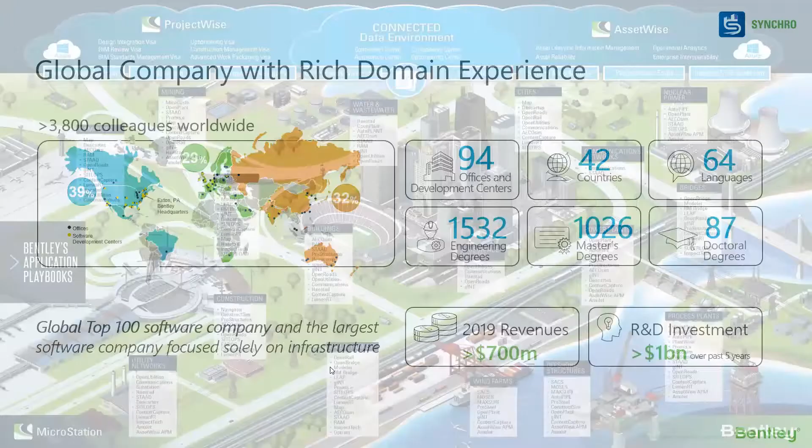Why is it important that we invest in research? Because in this virtual city of Bentley, wherever you have infrastructure, construction, or project planning activity involved, you have Bentley's presence - from buildings to roads to mining to campuses. If you have a water and wastewater project, or cities planning, that can be done with Bentley's platform, to nuclear power and utilities and all. In offshore, we have offshore and onshore wind farm technology, offshore structures technology, jetty design, and shipbuilding technology - you can design a ship there. We have process plants and everything, apart from bridges and power plants.

I'll move to the introduction of the Bentley platform. This is data we collected from different clients - for a couple of years we understand that 20% of the projects we studied ran larger than scheduled, meaning project planning overran, and 80% of projects were over budget. But what are the reasons for that? We understood that in these projects around more than 1,000 people were collaborating, 182 companies were involved, across 6 countries. For that reason, more than 2 million documents were shared, and more than 6 million - 64 lakh - actions and reviews were initiated, because manual technology was involved in every nook and corner of these projects.

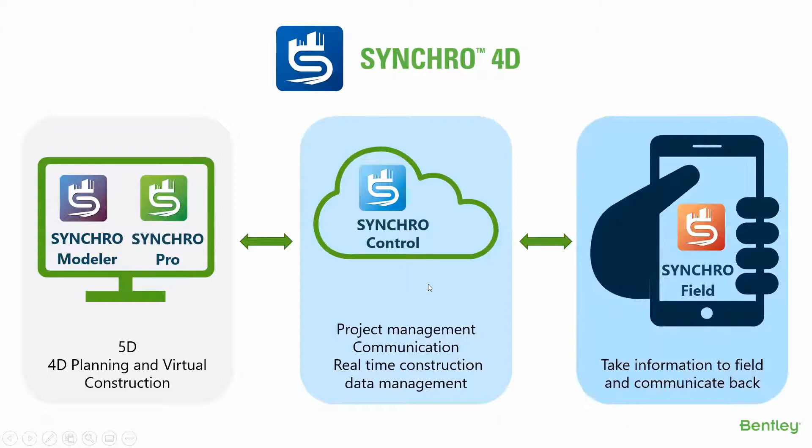Synchro 4D consists of your plain vanilla Synchro Pro with basic technological and logic improvements. We have upgraded our internal processes of Synchro Pro, which consists of Synchro Modeler, Synchro Pro. Now we've come up with a port where we included a project management and construction management part, where we are talking about Synchro Control, and we've come up with an app for use in the field, which we call Synchro Field.

In a nutshell, this is what it does - I'll come into detail later on. It consists of mobile field management. If you have a mobile team who wants to see model-based progress from the site, wants to issue RFIs, daily logs, site observations, or inspection reports, they can use the mobile field management app.

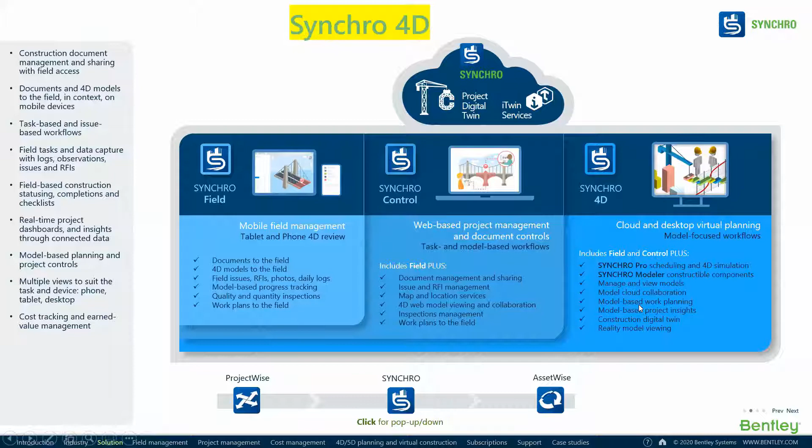Then you have your project management team, project manager, who wants to use issues generated from site, daily observations, or minutes of meetings generated from site, or wants to give instructions to the site - those activities can be performed by Synchro Control. And Synchro 4D will be used for planning and simulation purposes, model-based planning, 4D planning, and all that stuff.

So what is the workflow in this? Initially, for the planning stage, we have an authoring tool - it might be Bentley, it might be Autodesk Revit, it might be Trimble Tekla. With that authoring tool, we do a high-level plan in the initial stages, because there are a lot of uncertainties in the project, but you want to go for funding, or you want to bid a project.

So maybe 2 to 5% plus minus, you wanted to consider, but you wanted to do a high level plan and understand what is the resource optimization you do on that model. Then you took it into Synchro Modeler and create a constructible component from the 3D model that can be used to generate intelligence.

Then you attach schedule. Synchro itself has a full-fledged CPM scheduling methodology, so you do not need an external scheduling software. But as I talked about the 30% apps that don't talk to each other, we allow people to talk to other apps also. So if you have Primavera or MS Project, you can import that and extend your 3D model.

To that and create a 4D schedule part. Then you send that to the project management team, your project manager, or construction manager for verification, and then after verification you can send that to site.

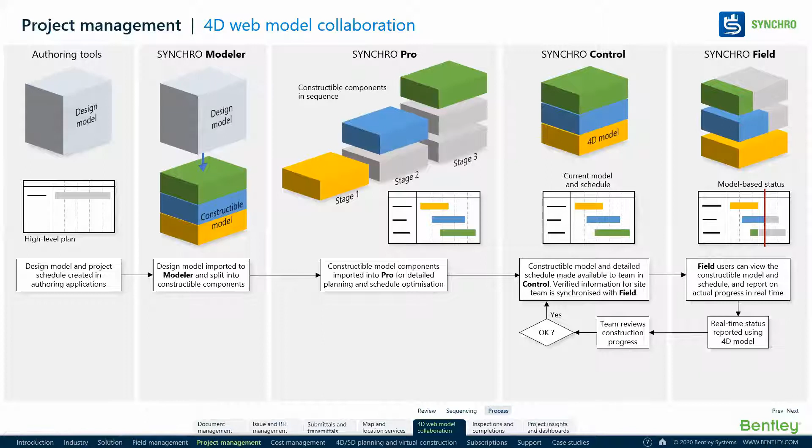You can send it back to your 4D planner. If he says yes, he can go back, but if there are some changes required in the model, he can again send it back to Synchro Modeler, your modeling team for the constructible component, and then send it to your consultant or whoever is doing the 3D model. Again, take this cycle. So this cycle is entirely a collaborating platform, and you can always tag people who are responsible and accountable for this.

So I'll start with the Synchro Pro part where we use Synchro Modeler. Synchro Modeler basically takes iTwin Services and iModelHub technology to improve interoperability by importing any 3D design model. It splits the model into smaller components, assigns cost codes and all, and it actually validates your plan.

So how does it do that? How do we do that? A lot of times, some of you are involved in linear infrastructure projects, and you have come across suggestions from the consultant that you wanted to break down the infrastructure project in a constructible format.

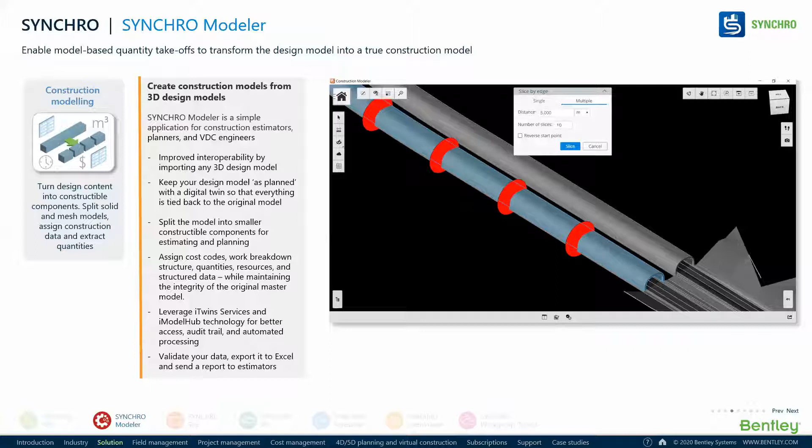Also, your crew ability may have the capacity to construct a layer, maybe a subgrade layer, maybe 20 kilometers a day or 10 kilometers a day. So you have to divide that and create the schedule. But all the design softwares like Bentley Open Roads or Civil 3D do the modeling by mesh analysis method, so cutting the cross section in your planning software is difficult.

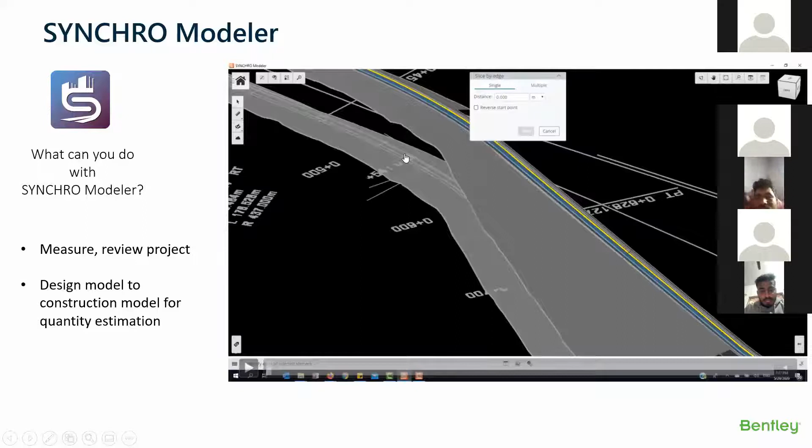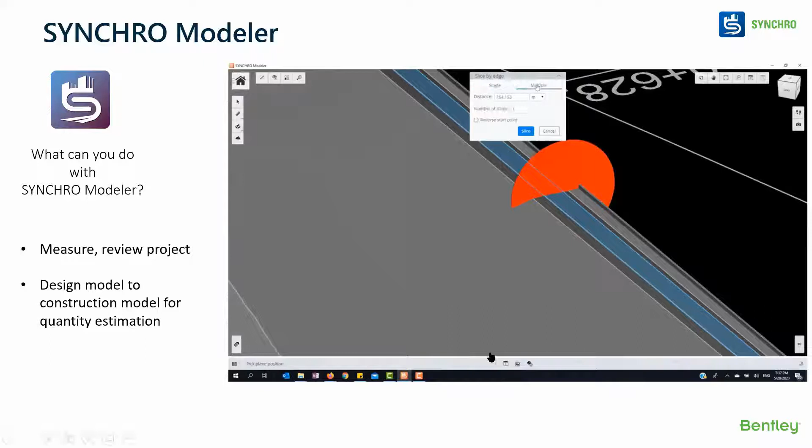So here I am giving multiple slicing and giving a distance which can be constructible, dividing the slice. So what is happening? I have this information that these slices—1, 2, 3, 4, 5 slices—has to be cast in 5 different days, so that I could attach that schedule here.

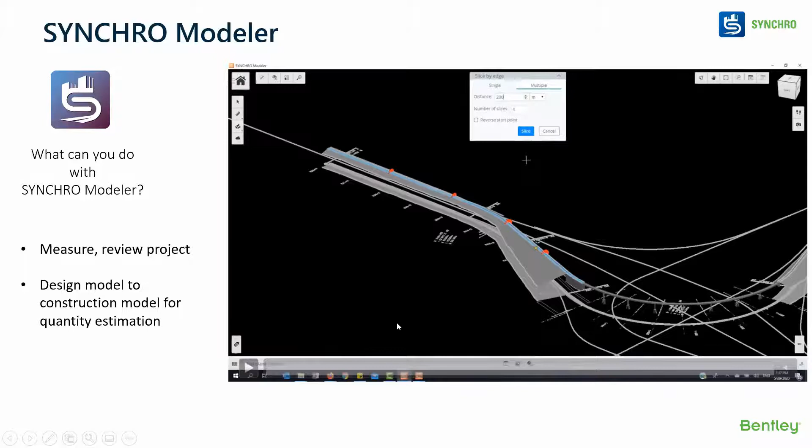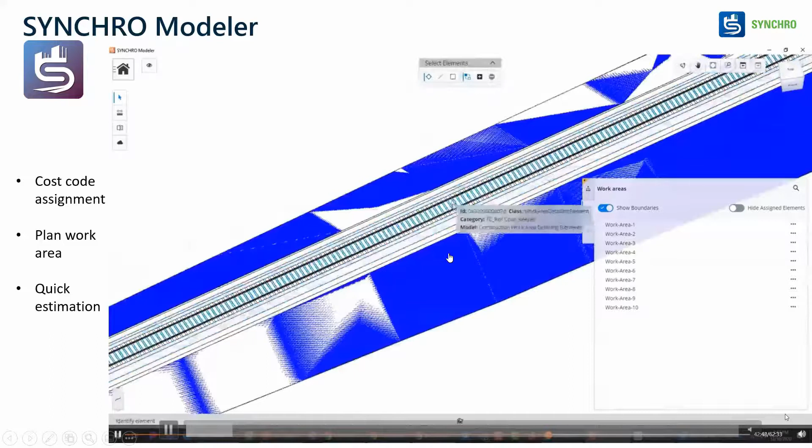Other than that, let's say you wanted to go for a quick cost estimation or cost analysis. For that reason, say you have a 100 kilometer road or rail—this is a typical rail project where we got the 3D model from Open Rail Designer, and we wanted to divide it into constructible components. For a 100 kilometer project, you might decide that 10 kilometers will be for project team 1, plus 10 kilometers for project team 2.

So we have divided it into constructible elements and divided the work area, so that you have better control on the project and who is doing what.

So after we create an area breakdown, we go for a quantity takeoff analysis. In this area breakdown, you can see we have work area 1, work area 2. Let me click on work area 6 and isolate it. So I understand, as a project manager or assistant project manager, this is the area I am having responsibility for.

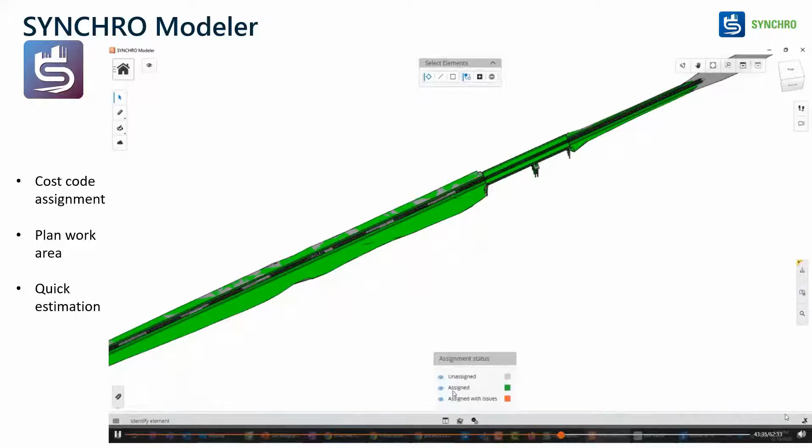But how do I get a volumetric cost calculation? How do I get a volume? So you have a 3D model. This is the 3D model. I know the 3D model volume.

Let's say this pier, and I wanted to check the cost of the piers to understand what will be my BOQ value, so that I could send that to maybe the tender department, or maybe a project manager, or maybe a portfolio manager.

So here I have created these cost codes. After creation of the cost codes, you could see I have created concrete cost codes. What will be the concreting cost? What will be the structural bridges cost? When you want to do concreting of a structure, what will be the cost?

So you have this cost estimation, or unit cost from your site, or maybe from a previous project, or you have taken a rate from your contractor, subcontractor, or labor contractor. So I just assign that cost here for piers, or for earthwork and rail—all the other costs I can assign based on the volumetric calculation.

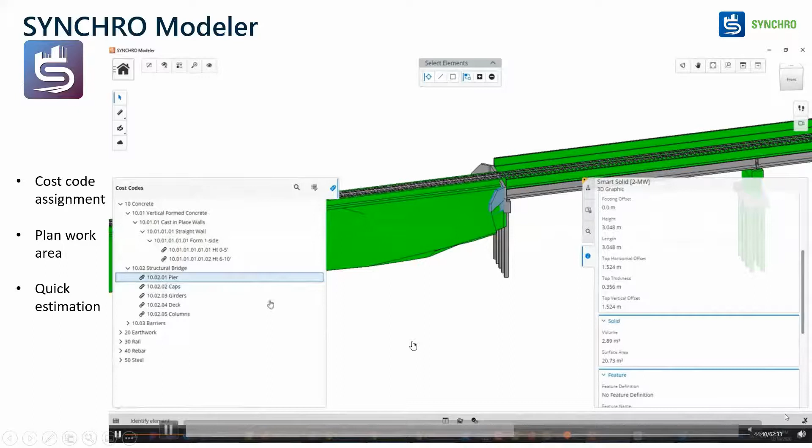So if you have a 3D model, I can assign all the cost codes. If I have the Excel file, you can see in the pier what is the volume here. When you assign this to the pier, that volume is taken into consideration and multiplied by the unit cost you got from your contractors maybe. So after getting that, you understand exactly what the cost for the pier will be when you want to cast that on site.

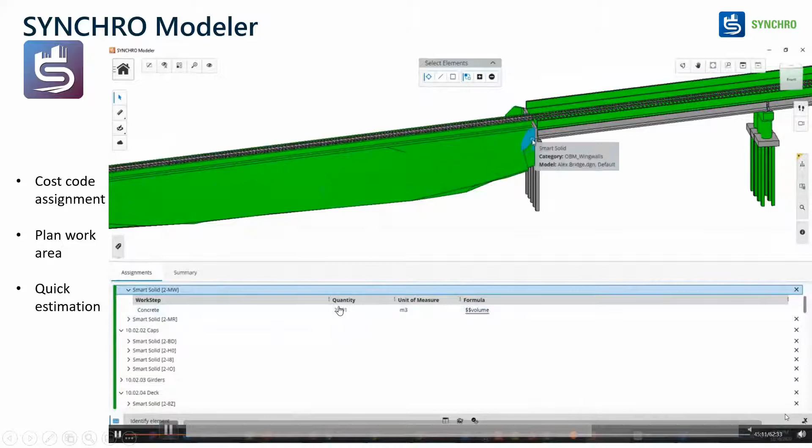So let me go to the assignment where I want to see what cost has been given to this pier. When I click that element, you can see the concrete is 2.891, that has come from the site. The unit has been measured, and I have a formula for the volume.

Similarly, if I want to see the rebar part, I could create a volume and understand it—I could create a formula. Maybe in this wall there is no rebar or reinforcement at the initial level, because you are doing a high level calculation. So you could give a formula of volume into wall length and apply a rebar factor—maybe from thumb rule, 0.2% will be the multiplication for the wall rebar and rebar weight.

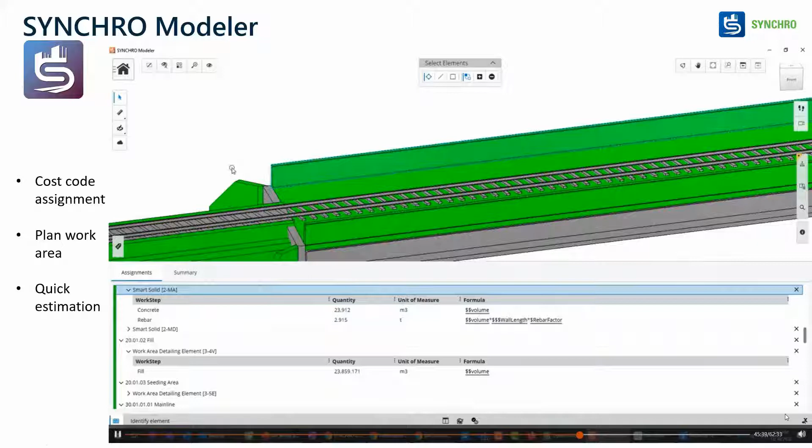So that calculation you could do, and you can import it over here, so you know exactly what to implement from your old project standards also. Similarly you can do a summary. I'll just go to the summary and see what is the cost percentage or entire cost on that. You can see these are the volumes, and you can create a cost code for the entire cost on that.

After that, I'll come to Synchro Pro—this comes with the old vanilla Synchro Pro, but now we call it Synchro 4D Pro if you want to go for Synchro 4D. It has all the capabilities like earned value, equipment planning, scenario comparison, health and safety. You want to visualize critical path, that's possible. You could do mobile field statusing and all. What-if scenarios can also be calculated.

So let me go one by one—this has been created only from my users' experience. So one question was how do we integrate the 3D model and schedule? So what do you do? You import a schedule, or you can create your own schedule over here. You could import a BIM model from anywhere.

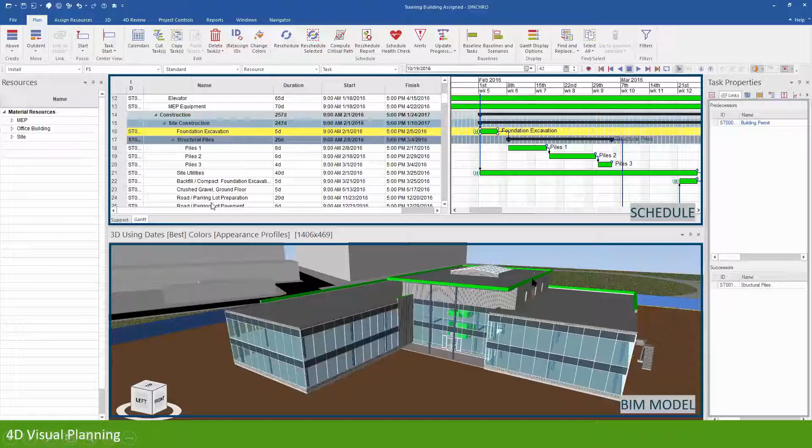So the next question is, what kind of BIM models can be imported? I'll come to that. So then you have the BIM model, you import the schedule and attach that. The question is what kind of BIM models can be imported—you can see all of Bentley, Tekla, Revit, Aveva, SolidWorks, Navisworks, SketchUp. Most BIM models can be taken into Synchro.

Other than that, for schedule you can use Asta, Safran, PMA NetPoint, Primavera, Oracle P6, Microsoft Projects, or even Excel also.

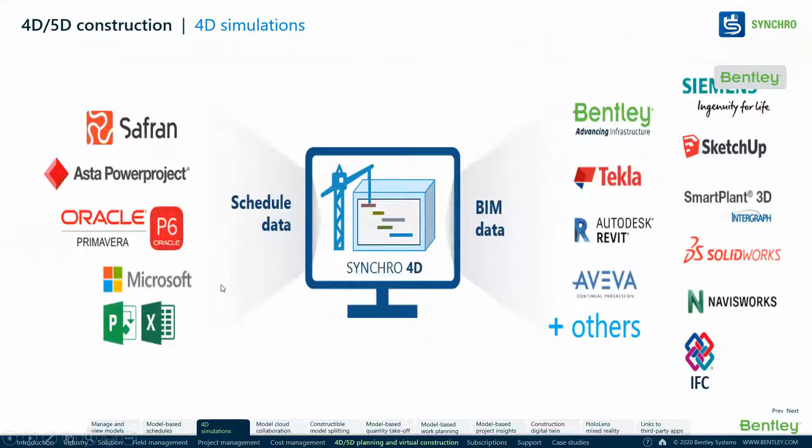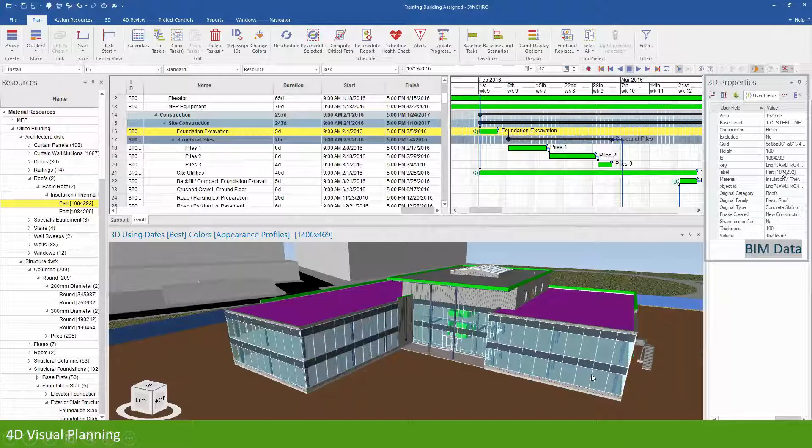So the next important point I wanted to show is 4D visual planning. You can do a 4D visual planning with the BIM data, coming from native softwares. This is a Revit model I have worked on, so you can see the concrete volume, the area, and all that information comes together to create a BIM model.

Now one question always comes: can we do a critical path or a 3D visualization critical path? This is very important from a project perspective, because if you know your critical path and visualize that, as a project manager you can go check those pillars or that place to see if things are working well. You can delegate work for other resources to someone else and concentrate on this critical part. This is the importance of 4D scheduling.

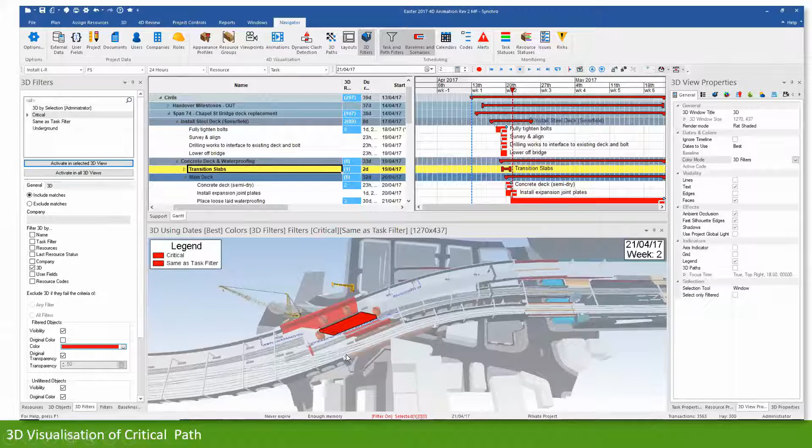How do you do that in Synchro? It is very easy to follow. You can see a schedule is there, a 3D model is there, and what we do is create a task filter.

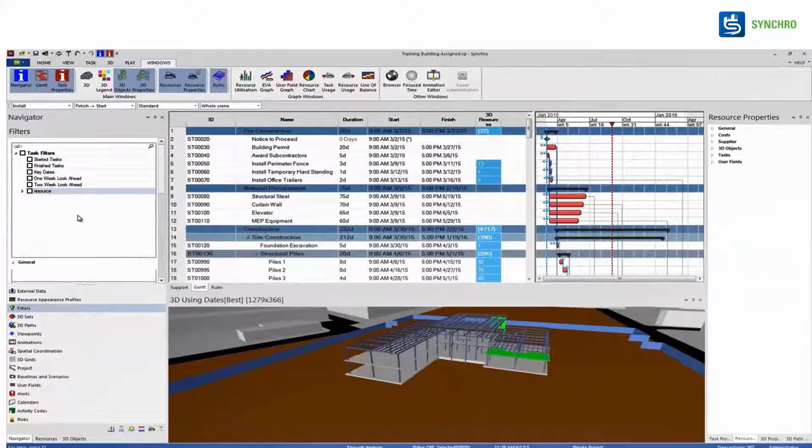On the left-hand side there are a lot of filters. For 3D critical path filtering, we just right click on it, go to filter, and say critical path filter. This only highlights the critical paths. You can definitely create your own color codes and appearance profiles for this combination, but I'm not going into that.

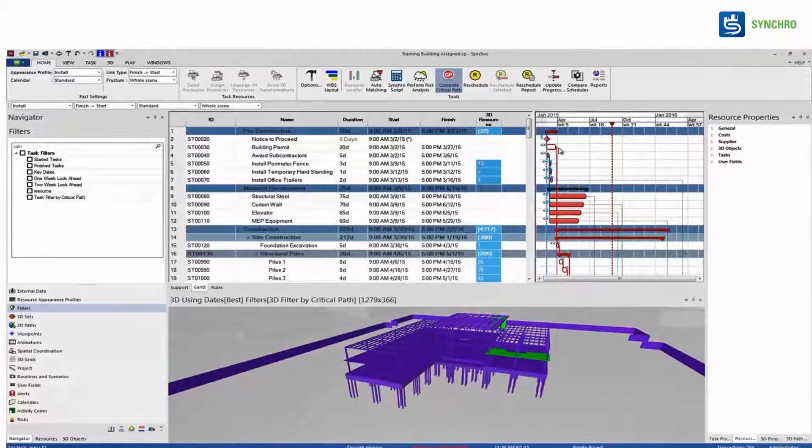In Synchro Pro, it asks you to update the critical path. You update it and your recent critical path, the one at this point of time, will be highlighted. If you don't want to see it, you can view all tasks or only the critical path. As a project manager, from experience, this will be very important for you, so you can put your efforts into envisaging how to work on this critical path in a better way.

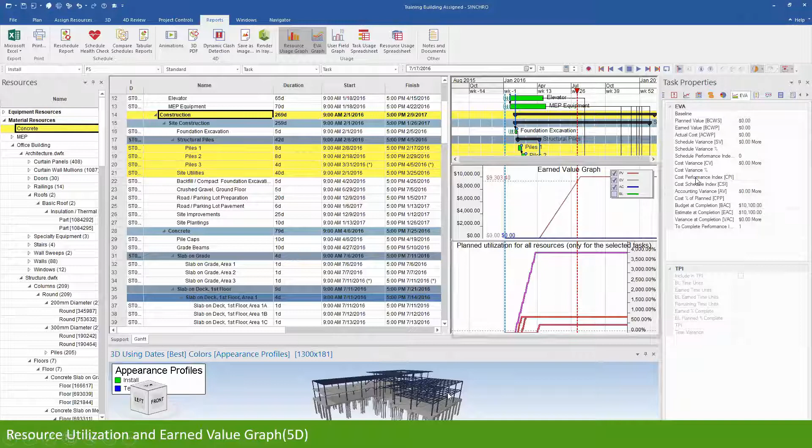Another question that comes up: can we do resource utilization and earned value analysis? Yes. What I did here is create a schedule and an earned value graph with resource utilization. You can see in the task properties the earned value parameters, and I wanted to show how we created planned and actual resource utilization for concrete used for graphs.

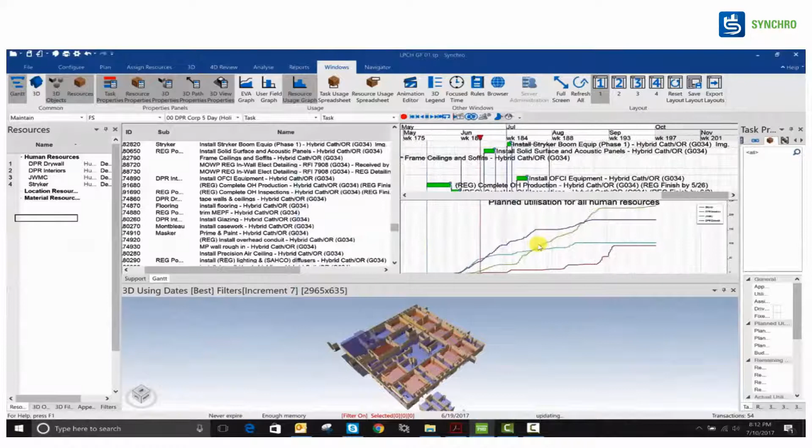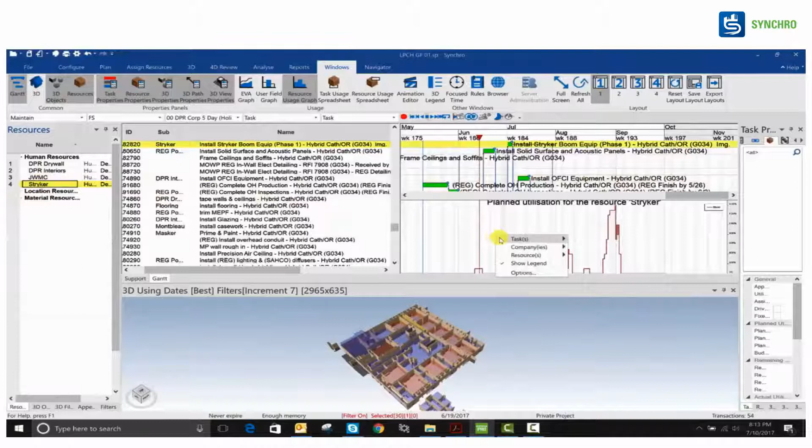Here you can use this planned utilization of human resources, this is the resource we have selected. In the human resources graph, let me check the histogram. For a particular resource, every project, you can use histograms to see what is required on that day for that task and so on.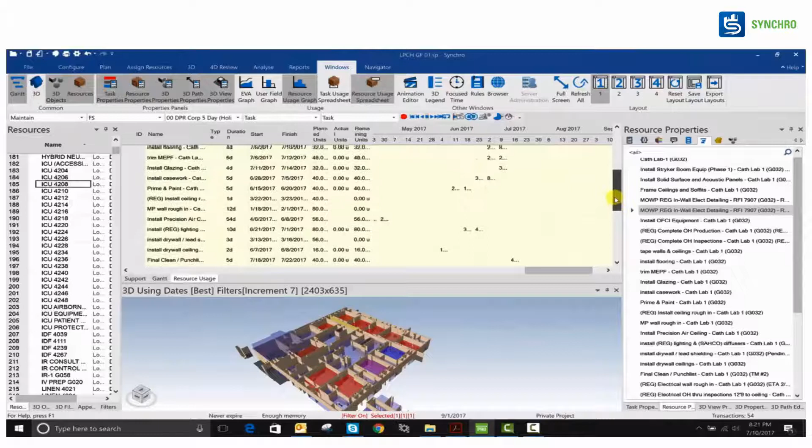Other than that, you can also export this data in a tabular format or to Excel. In this tabular format you can find the planned resource for that day, who is busy. For example, if you want to use a crane in both parts of the site, but that crane cannot be used in both places at once, how do you know? You'll know from this Excel sheet or histogram that the crane is occupied, so you can plan for another crane for that second part of the site.

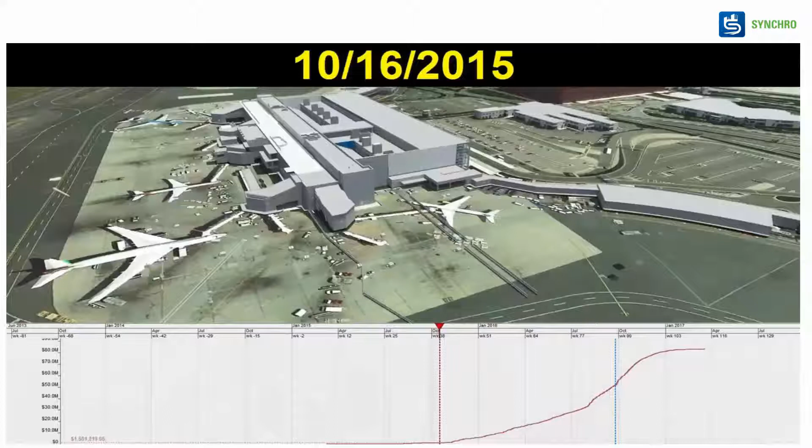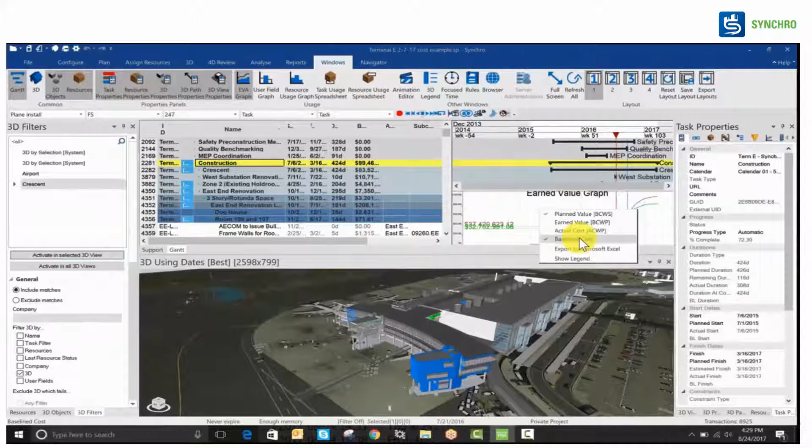So at the Boston airport project, I'll just show an earned value graph of what can be done. This is only a planned value, but you can definitely add actual cost and do an earned value graph too. You can see the earned value moving for the 2015 and 2016 project, and you can attach the earned value graph to the task properties to understand the cost. You can also create as many baselines as you want for this graph, create the baseline cost, and compare that to the earned value cost.

Another question I was asked is whether equipment planning and movement is possible for health and safety purposes. It's definitely possible. This is a project we did for one of our clients, which I won't name. You can see how, for a project, you can move equipment like an excavator or truck, and use cranes or other systems to see the frontage and whether the right of way for that equipment is possible.

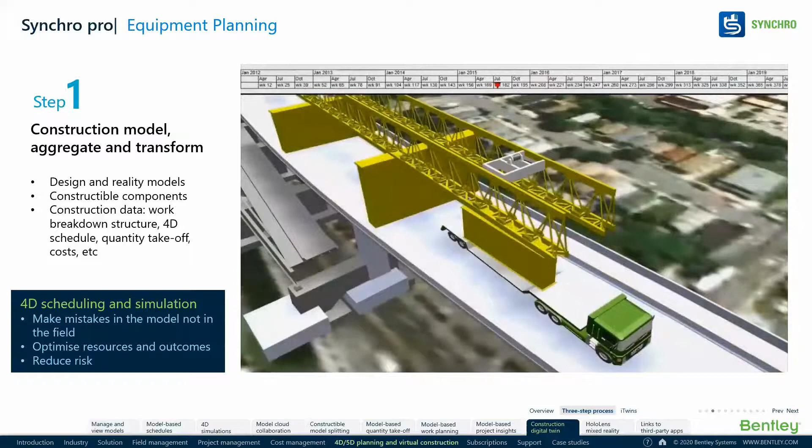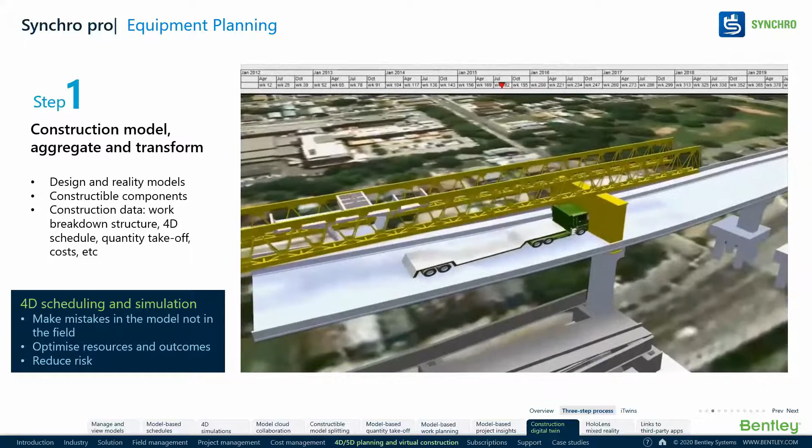Apart from that, for a lot of projects you have a gantry girder or balance cantilever. You can plan how the girder is moved and attach it to the schedule. In this project, you can see the schedule on top and use the balance cantilever for a metro project. Most metro projects use this throughout the world, so if you're involved in a balance cantilever project, you can use it properly.

Another part I wanted to show is how to plan equipment for a linear project. You can plan the equipment accordingly and see the crane movement. This is an interesting crane movement example, where you can plan your equipment to understand the boom of the crane and whether there could be access conflicts with other equipment.

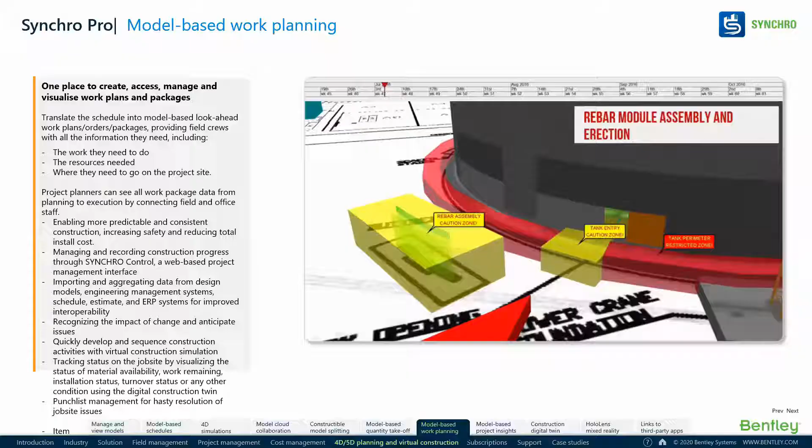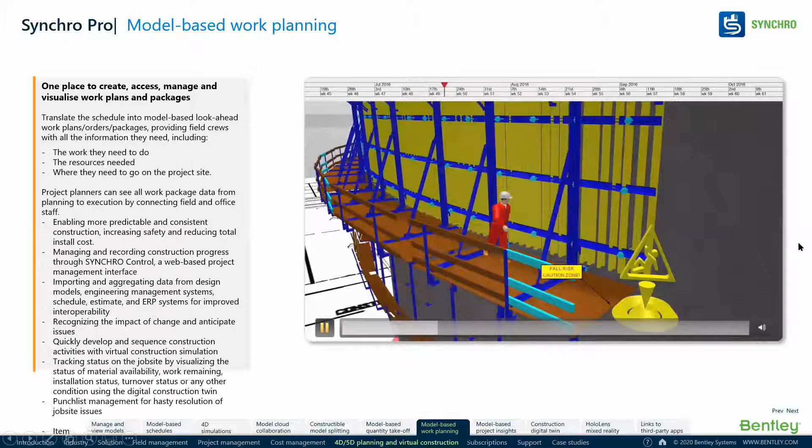Another aspect is health and safety, as I mentioned. Here you can see one project using a slip form technique. One person wanted to move from one part to another, and you understand that this portion has been kept as risky for this kind of equipment, so they don't want the person to move there. You can 4D visualize what happens when the person comes onto the work platform, and really understand and communicate that to a health and safety officer who can work on it.

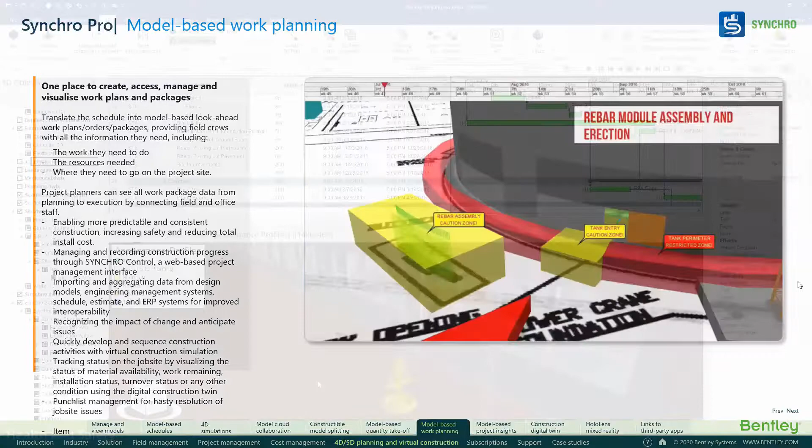Next, you can do a scenario comparison and create a baseline. There's always a question about how many baselines can be created. You can create as many baselines as you want, whether for plan versus actual or proposed versus actual.

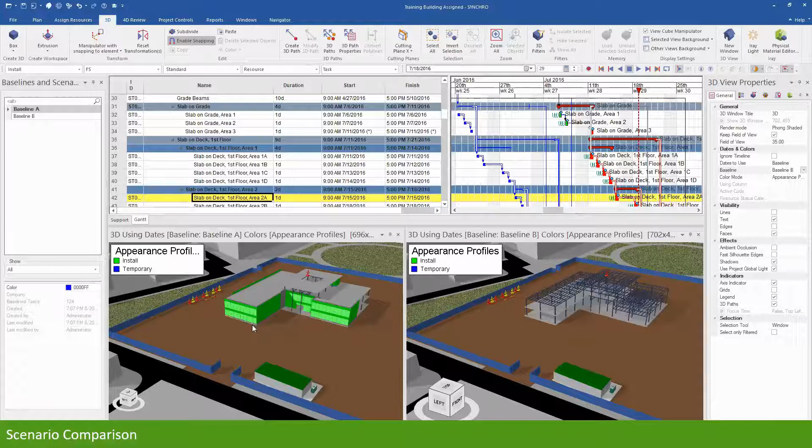You could do this baseline comparison on the 3D model. This is an example where we did plan versus actual: this is the baseline schedule as the zero budget schedule, and this is the alternative scenario. We worked out two plans and presented to the client one plan with the baseline created, but if you do this, you can create a more accurate scheduling. We created the scheduling for compressors, pipe racks, tanks and structures, so you can compare activities between two different baselines and plan your resources accordingly.

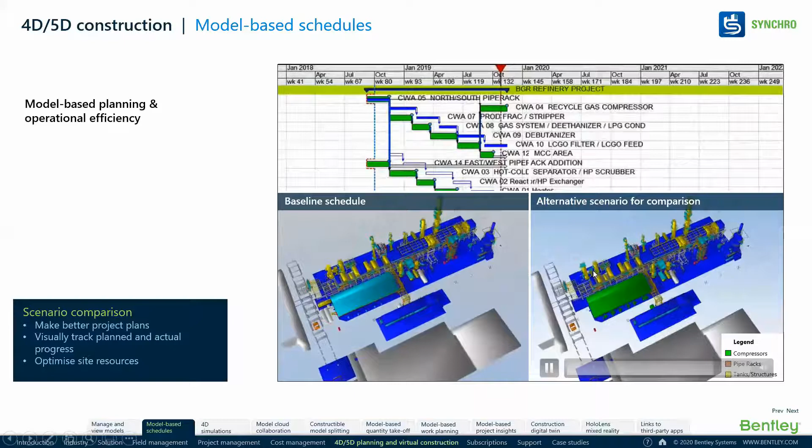A little bit on the Synchro scheduler: Synchro is a fully-fledged CPM scheduling technology. You can create your schedule from scratch, set task durations, add logic, and Synchro will calculate the logical critical path. You can create multiple scenarios in Synchro and do most things you'd want in a scheduler. Other than that, you can import from Microsoft Project or Primavera, do resource management optimization, and generate reports.

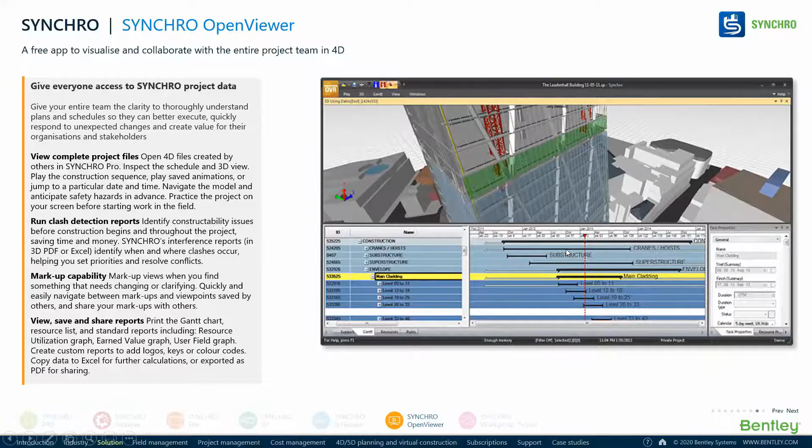Also, someone may be working on just one project out of a hundred, and only want to view that one. We have a complete open viewer platform where you can not only view the model but also run a clash detection report generated by Synchro Pro, and use markup capabilities in a prominent way. So that's what Synchro Pro was about.

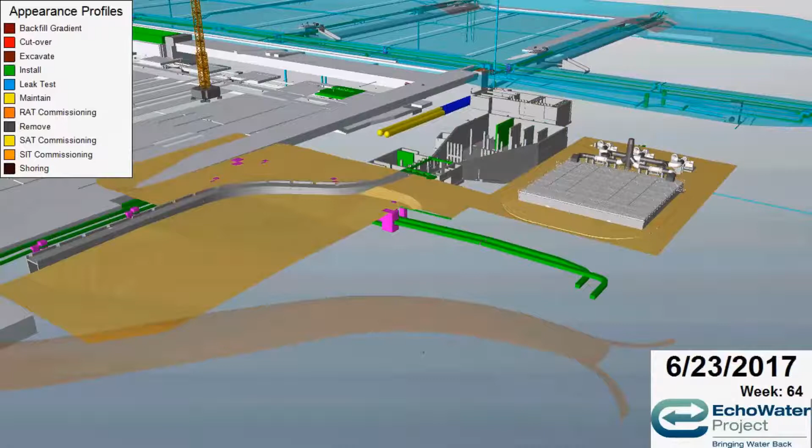Before moving on, I wanted to share one project I really liked on the Bentley platform, an EchoWater project, I think in Holland. It's interesting because it took care of the underground piping system, the ground terrain, the buildings, and the plant and factories behind it. It also took care of equipment movement. This is how you could do a 4D simulation to show your management or anyone on the client side to get their buy-in.

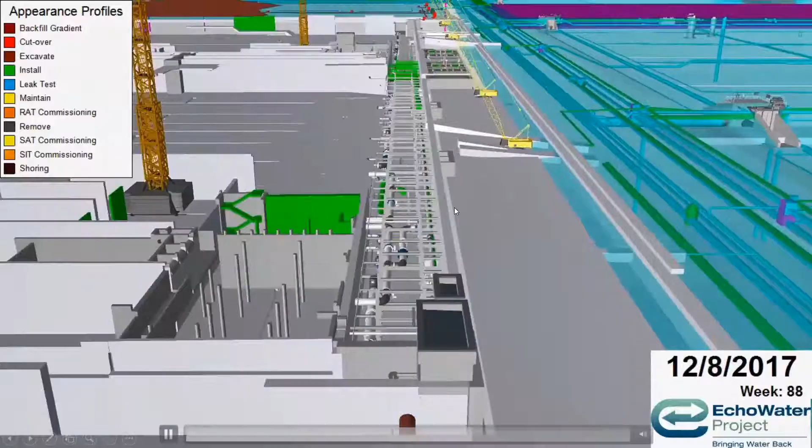So let's move on to Synchro Control. As I mentioned, I'm running out of time, so let me quickly go through it. Synchro Control is the hub of the Synchro 4D platform, used basically for controlling the project.

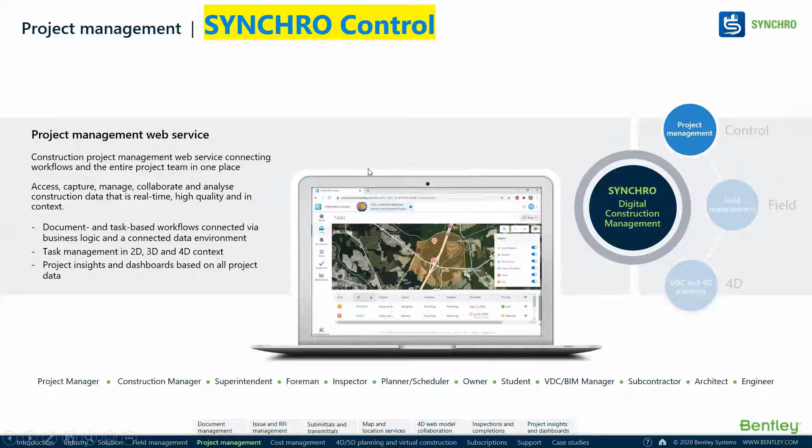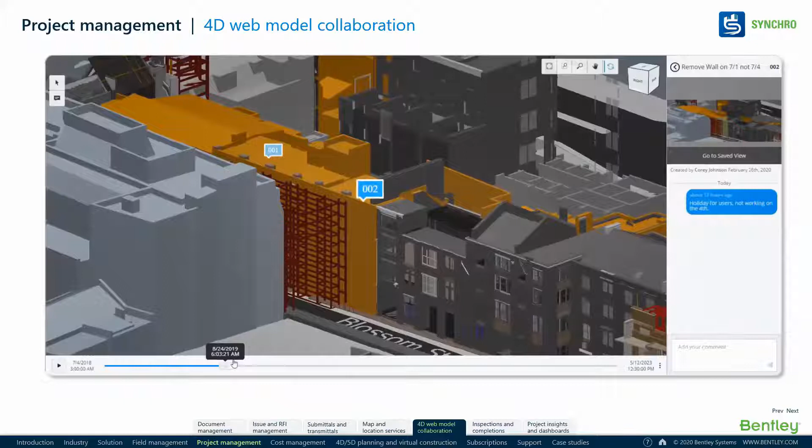So in Synchro Control, if someone does a schedule or a 4D simulation in Synchro Pro, he can import it over here and view it in a web browser. The major advantage of using Synchro Control is that it's a web browser based Microsoft Azure backed platform where you only need a web browser, Google Chrome will do. You do not have to have any other hardware platform to have Synchro Control.

So this is what we are doing in Synchro Control. You can see you have a schedule over here. You could go to schedule and import that model from a previous Synchro project, either by importing an SP file or importing an iModel. You could create an iModel over here.

So after importing that, you wanted to see the scheduling. Let me go back. You wanted to see the scheduling here. So you can see it is web-based. I'm just viewing the scheduling in a web-based platform, where I'm sharing the scheduling over here.

I could see and comment on what is happening over here, and I could tell my scheduler that this is not exactly what is required from the site. Or we could see from the project progress, duration, start date or finish date, I could advise him to change this. So what it does is, he opens the same project in Synchro Pro, and he got the information from Synchro Control, and he is opening that.

He understands what change needs to be done, or maybe what the logic should be. You can see he's addressing the same Synchro project. So this logic might be changing, or my manager has told me to add some more human resources on that. So he is working on that, and changing it in the planning phase.

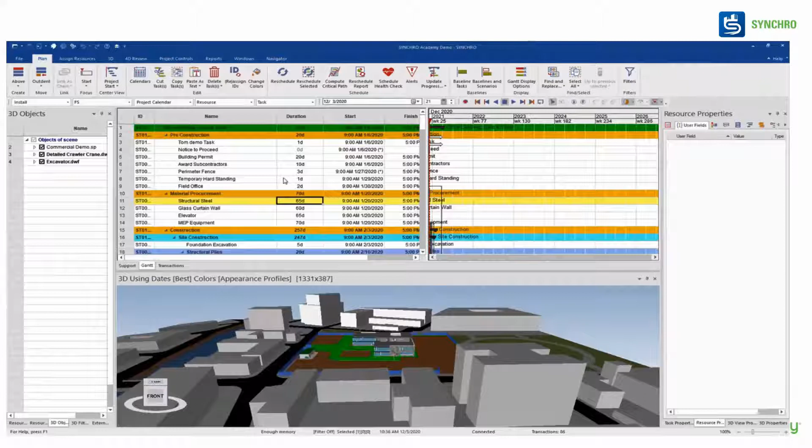So what is happening here? When he changes that in the planning phase, let's say I am just inserting one task above and mentioning that maybe a task to be held over here, giving it a day. So the same task is updating over here online - it's a Tom demo task. What you have given, a 1 day timeline, has been updated.

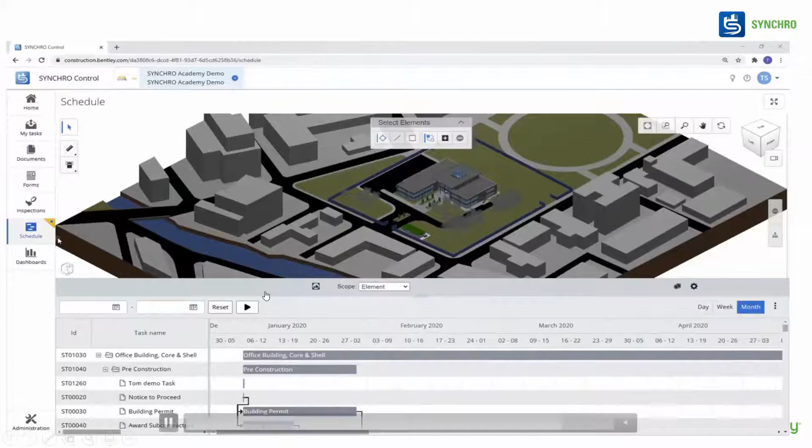So as a project manager, I do not have to go to Synchro and install heavy software and all. From a browser, I understand and give an instruction to the planner. So next, let's look at what else it does, other than this part.

It does document management. You could see a project has been created. You could select a project selector. These are the modules it's having. This is the first front page where you have recent activities, my task, and quick links. You can see issues, and create new issues, new observation, new RFIs, or new daily logs.

Then you can authenticate your working, and you could see the document. You could see the module and who will be given permission to that. Let's say you have an organization folder structure - you can take that organization folder structure over here, and copy paste that. You have a selection panel where some question might come.

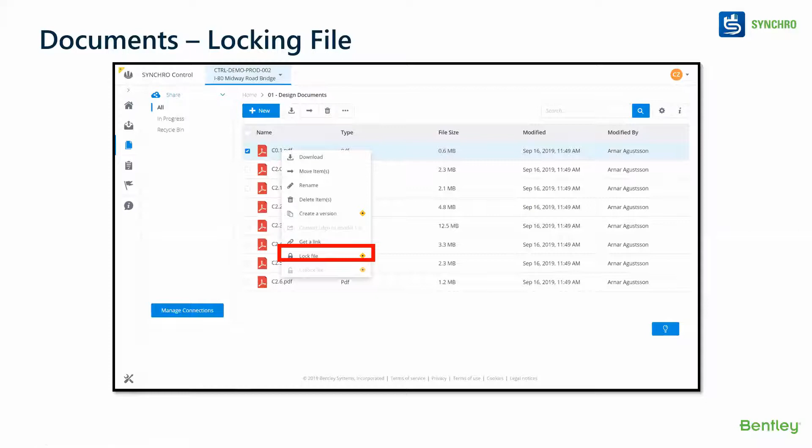Anyway, you have a selection panel where you could lock a file also. Let's say a PDF file has come, and you wanted to lock it from other employees where it's not necessary for them to have that information, so you can lock it over here.

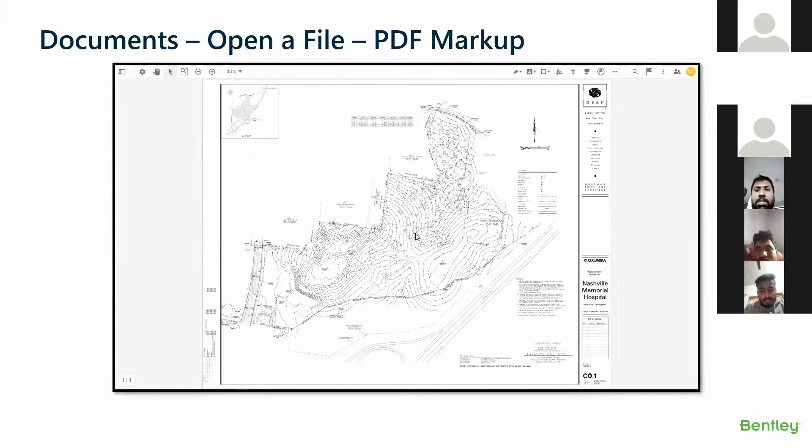Also, you could do a PDF markup - I wanted to go into the details but time is short. You could do a PDF markup, and you could open your Word document in the browser and edit it. So everything is inbuilt over here.

You could do an audit trail also. So whenever you are doing something, and who has done that, you can create that audit trail information - who has changed that, who changed what, and at what time. That information will be visible at your fingertips.

Also, you could add your new file, add folders, upload, drag and drop, or find, search and upload it. All the action buttons are there, just normally like SharePoint or any other platform - delete, download and all that stuff. So if you have a project, let's say you are working on MTHL or MSRDC or any project where the client or owner operator is using this, you can attach to data source.

If you have a username and password, you can attach to it. Other than that, you can also attach to SharePoint. So I'll just go to the next slide where you can see it attached to a SharePoint site also.

So other than that, what is another issue, as we discussed in the initial slides, is that there will be a lot of issues created in the project. There are a lot of RFIs created, and how do you handle those? That creates coordination issues, responsibility for delays, and budget overspend. So many million drawings were issued, million action items were issued. So how do you tackle that?

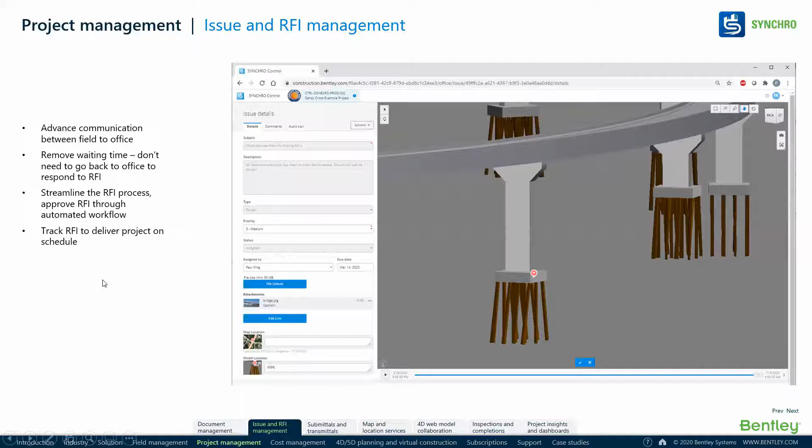So I'll come to the detail in the fourth slide. Maybe I'll show what can be handled here. You could create an issues management system where you can streamline your RFI process. You can track your RFI. If you have a transportation project or maybe a plant project, you can...

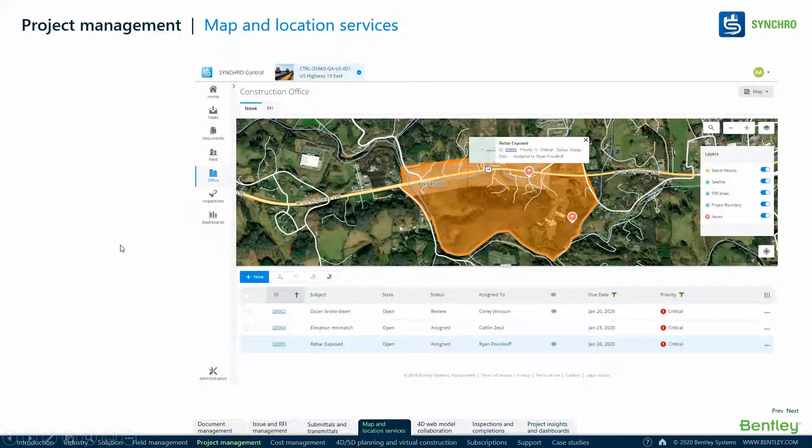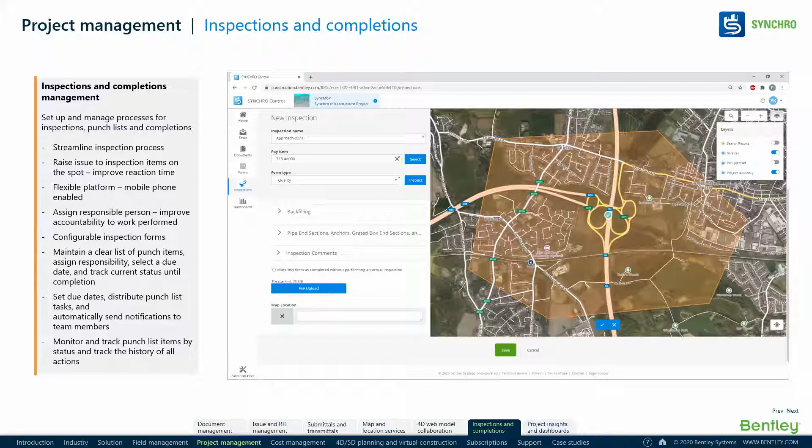Pinpoint exactly where those issues or RFIs are located. So you can use Bing Map, which is free and comes in this as a location-based service, and you can convert to that. Also, you can do an inspection. This way, the inspection can be streamlined. You can maintain a clear list of punch items with due dates on a flexible platform, using a mobile phone.

And for the other end, I will come to that. We have a project insight and dashboard where whatever you did, whatever issues, RFIs, or daily observation logs were created, who it's been attached to, who is responsible, who is accountable, what date they were accountable, when that was due and not done—everything can become a dashboard format. So I'll show you how to do that.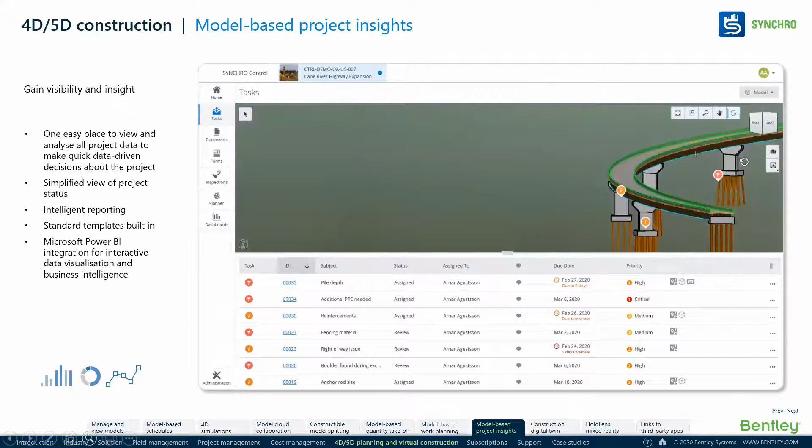So exactly what is the advantage of this? You are communicating to the person responsible for handling the task that this is your task, this is where it is located, and this is where it is in the model—you have to go there. So you're communicating exactly without talking to him or communicating verbally.

For this reason, you have accountability. You know that today I am assigning this to him, and he understands. You give a due date, maybe tomorrow or the day after, and if he has not replied, there will be a red flag, and you understand that this is not working properly. You could take corrective action.

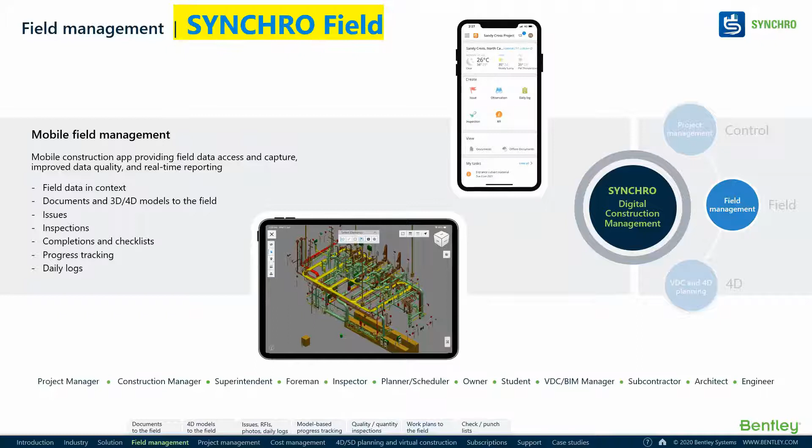So as a project manager, this is helpful for me, but how do I communicate to the field? We have a Synchro Field app, where you could document and mark 3D/4D models at the site. You can do issues, inspections, completions, and checklists. So how do you do that? What exactly will you be able to do?

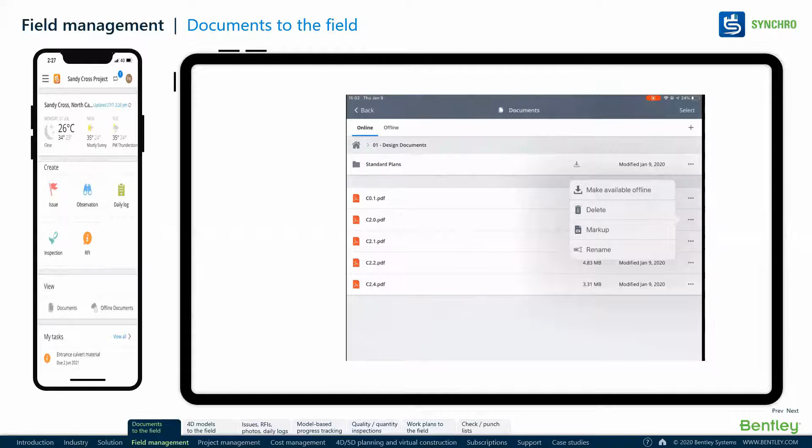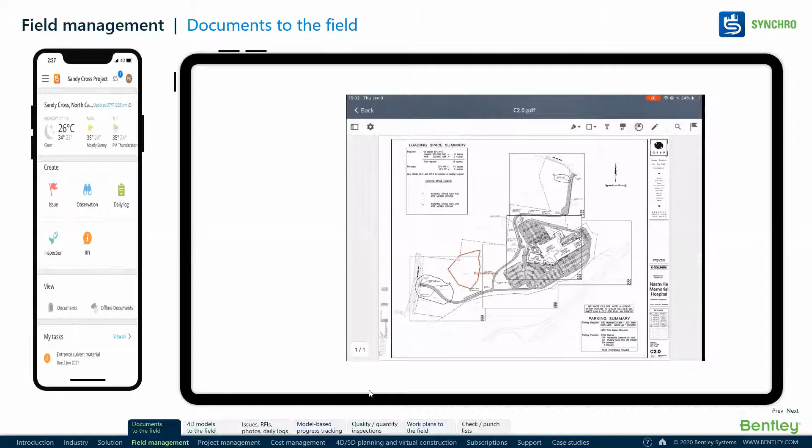You can take the documents to the field. As you can see, all the documents, so if I wanted to assign something to someone in the field, it can be accessed from the field, and it can also be used offline. This is a PDF document—if you want to open it, sometimes at a site there will be no internet connection, so you could download it there and work on site. Whenever there is internet, if you want to upload, it will be automatically uploaded. So the PDF and all those reviews can be uploaded when the internet is available.

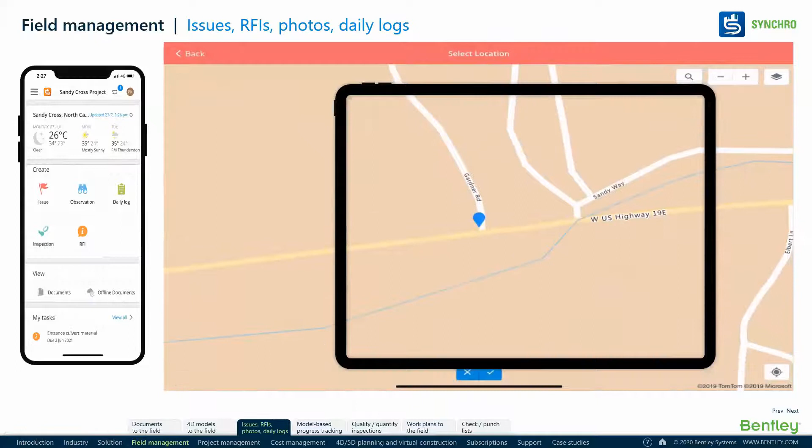So here, if you wanted to create an issue, you wanted to attach it to a map, everything is possible. You could attach it to a map, create an issue, and assign it to someone.

As I showed you, you wanted to assign that to a model, you can do that. Another important part is updating the status.

There is always a dilemma for the project manager about what is happening on the site. They might be updating a schedule, but our project schedule could be 2,000 or 3,000 pages. How do I understand that?

Can it be possible that with the 3D model I do a 4D simulation, I can compare side by side what is happening, and those information inputs get directly uploaded from the site?

Definitely. Let me quickly show you. So let's say as a project manager, I have assigned some task to someone. The person knows exactly what the task is, and he's checking that.

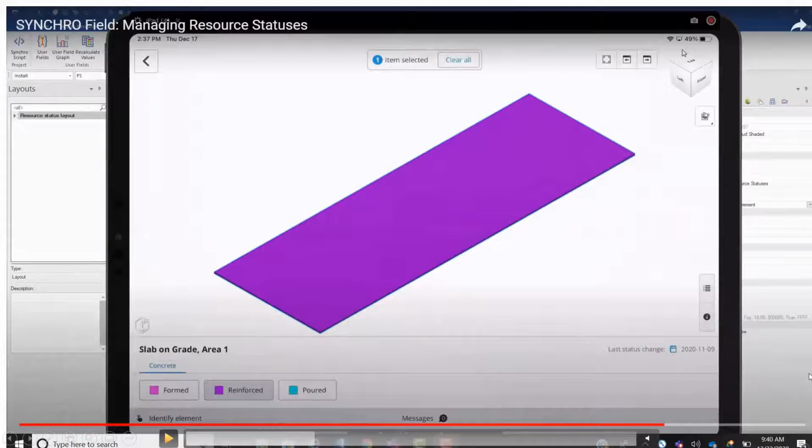So here you can see I have given a status data that says formed, reinforced, and poured. This is a concrete slab, and I have given a color coding.

So the person on site can choose that this has been reinforced, and he gives a color coding on that. From the site, I got the information and could compare it to the original plans. So here I wanted to change this to poured, and that information will be updated.

Let me go back a little bit. You can see here all these items will be synced when they come online.

Other than that, you can do a quality inspection. Here you can create your quality forms. I wanted to check my form for the concrete strength, whether it's formally achieved on site or not.

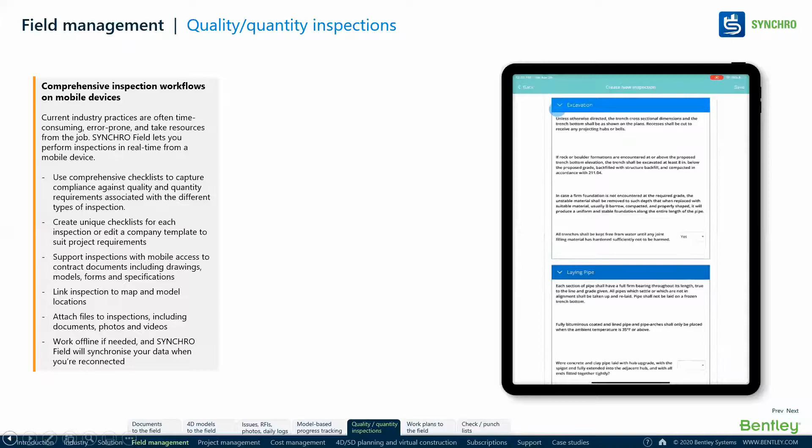Maybe I'm using a M40 concrete. What is the strength achieved after 14 days on a cube? I have instructed the site to use cubes, so what is the strength after 28 days? That form can be created and assigned to someone responsible.

You can also take the work plan to the site. You can create your resource group where some kind of work packaging system can be created, and that packaging system can be used and transferred.

That information goes to the site, and from the site you can get work plan information back to your headquarter or your project manager.

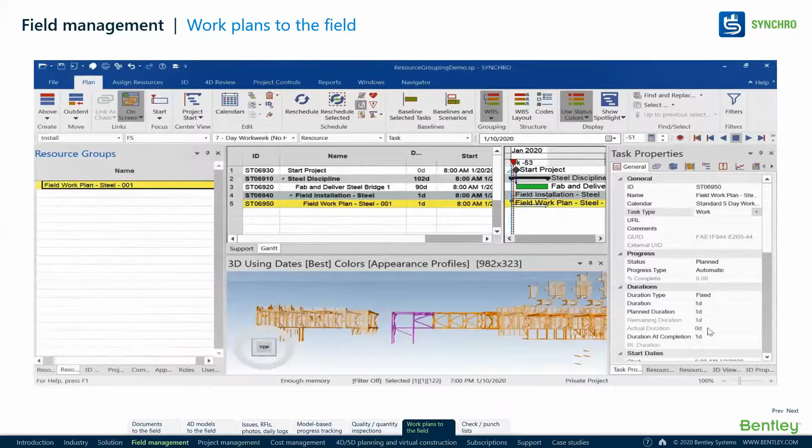I think I'm coming close, I have only 2 minutes. So what exactly is the Synchro 4D platform?

As I mentioned, we have 4D and 5D planning and virtual construction. We have Control for the project manager, and Field for field personnel.

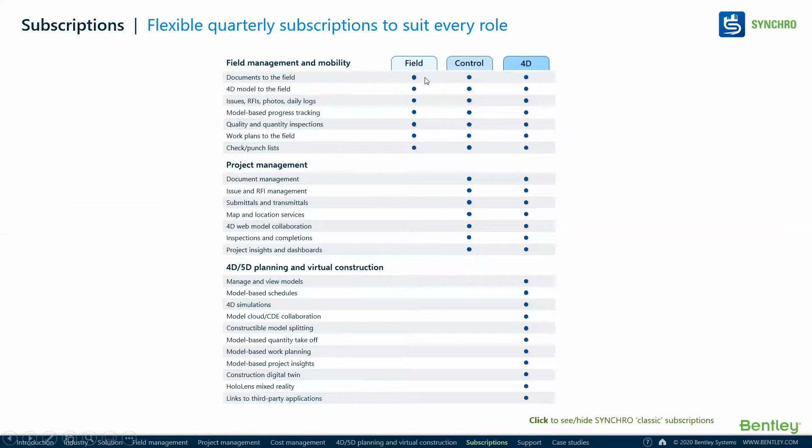When you go to Synchro, as most of you are on the Synchro platform, you know that we have tech support 24/7. We also have a Synchro app academy where we have invested a lot of time and created a lot of data sets for learning.

You can learn Synchro in your free time, or after office hours, or even during office timing.

So you also have instructor-led training that could help, and we have consulting services for digital advancement. With this, I think I have finished within the time.